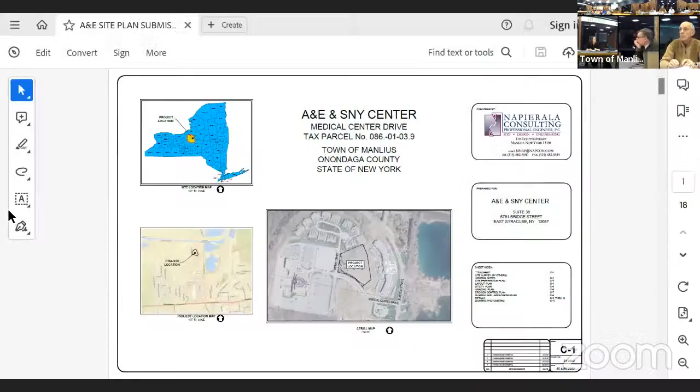And some of these, Doug said, have already been addressed, maybe. Scratch this. I just want to make sure I understand. C6. Yep.

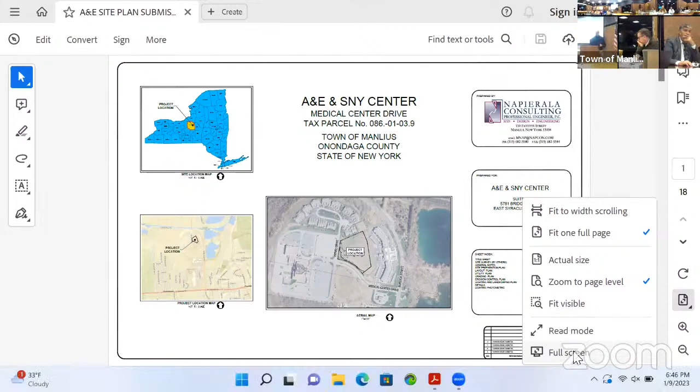So looking up in the northwest corner of the property where the entrance is, there's a lot of uncaptured runoff given the placement of catch basins. And at 7%, that's fairly steep. Very little is going to be collected in the catch basin down by the right of way. The rest of that runoff is going to end up going into the curb line and running down the road, to the catch basin at the corner of Avriel and Medical Center Drive.

And I think that could be a concern in the winter, especially with icing. I think it's something that could be remedied by tweaking the grading. Yeah, we could do a few things. We can put a little more of a crown in the driveway, or put in a trench drain. Really, that would be about the best solution.

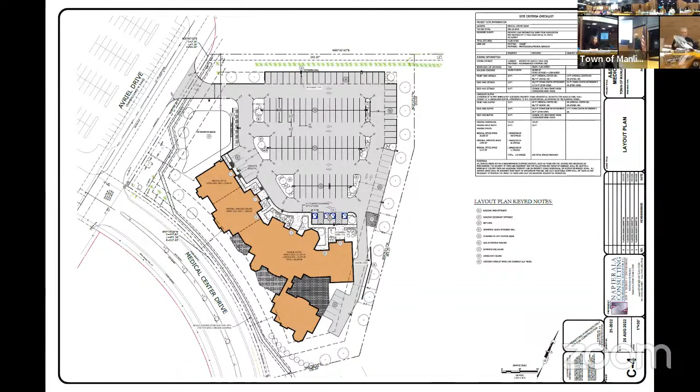So, because they can't see the grading coming out the other side, the grading plan, that's why I was. If you look at the grading plan, the contours don't completely cross. So I just want to make sure that people, that's a pretty small width of sidewalk, could be funneling all, you know, not like everybody's all coming at once, I get that, but

the nuances of how that kind of works, and to make sure that the handicap ramp is lined up with the entrance in a way that people can maneuver through there easily, especially when you get snow. I think you know what I'm asking. Yeah, we can look to adjust that. It could be as simple as bumping out the concrete and making the sidewalk a little bit wider

there. It's really tight. I'm uncomfortable getting into this area. I am not a code enforcement officer. I'm not an engineer, and we're getting into areas that I think go beyond what the planning board should do. I just want to throw that out. That's my. Pardon?

Maybe not, but when we get into handicap ramps and so on and so forth, that's something, when they go to get a building permit, they look at the building plan. We're not looking at construction plans. We're looking at a site plan. And so when we get to construction drawings, and a code enforcement officer has to look at it from elevations and ramps and so on, that's beyond what we do here. And that's just my opinion. Other people may have different.

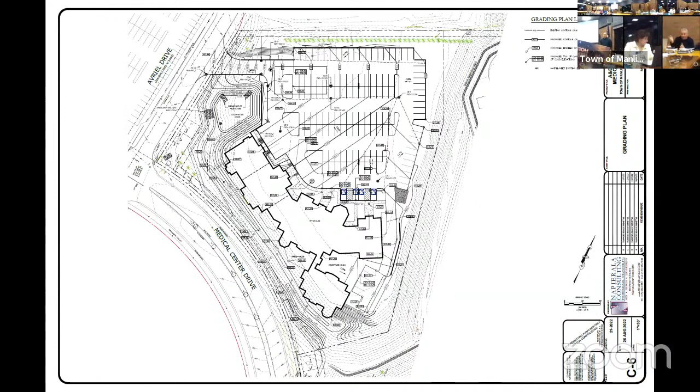And specifically, if the motion were motion to approve as presented, subject to the following 11 items being addressed by engineering. I would entertain that motion. Second, with comments, because there could be other engineering issues beyond what we just discussed. Right, in legal, you would always have control of those. So those specific ones would be good to put out so we know what those are, subject to a final legal and engineering. And also, one of the things we discussed earlier is that the uses be substantially as presented on the plan, because those are important to our control. So that's going to be a condition.

Also the finding on the variances on the road and block transfer. And a comment to follow up on that is that the variance was granted for the loading dock and the garbage removal. Can we put hours of operation on those things? No. So we can't say you can't collect garbage in the morning? That's why. I was gonna throw in one additional: subject to pulling the building permit. Is that doable? The only reason is it's a crazy world, getting everything. No, it's for extension. Okay.

And my understanding would be if any of these 11 plus engineering conditions require any sort of changes, they would come back for an amendment. Yes, that'd be my understanding. Arnie, did I see the sign? Did you make a motion? No, sign's not done yet either. No sign is approved. Correct. Didn't show that because of the other project you wanted me to take off. Okay. Folks, we have a motion made by Arnie, second by Richard. All in favor? Any opposed? Motion carries. Thank you.

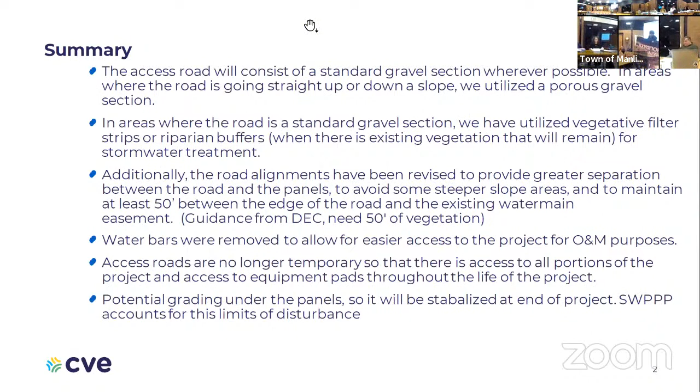Okay, to refresh my memory, the access road comes off of 173 near the cell tower, and that's the only access? Yes, correct. Okay, and I'm assuming you have now purchased the land. I see the stakes up around the cell tower. Yes. So it's been surveyed and bought, and recorded the subdivision? Yes. So the entranceway up Ruger Road? We do, but it's only a short entrance for the utility company for a point of interconnection. It doesn't connect to the facility.

I can pull that drawing up. These are all construction tweaks, and this is our last set of construction tweaks. Yeah, we heard that last time.

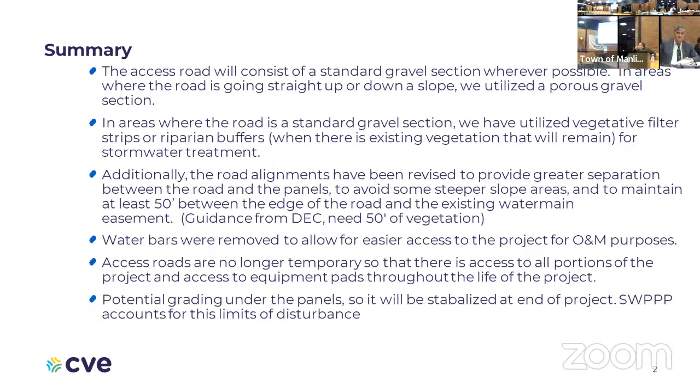So, we're shifting from the pervious gravel road to a standard gravel road in combination with vegetative filter strips. We're adding more spacing between the vegetative filter strips and the panels, which is increasing the spacing from the panels to the road. We only have one access road now, not a temporary construction access road and a permanent access road, just one permanent access road. And we're doing a little bit more grading underneath the panels. Is that the one that we went to the back, that's bumpy? Yes, we're gonna improve that. That will be your road? That will be our main road, yeah.

And you're not expanding the size of this development, so you're not approaching any of the setbacks, it's basically the same size? No. Same size, same number of panels, same everything. Doug, do you see any difference in stormwater? No. Looks to me like there's no impact that the community will be seeing, and the structures aren't going to be changing.

Carson, have you got your panels yet? That's a Mark question. Okay, Mark, have you got your panels yet? Yeah, we're just getting our panels in for this project. Where are they coming from? Mark, do you know who the manufacturer of those panels is, and what country they're coming from? Let's see. Christina, where are they coming from? Vietnam.

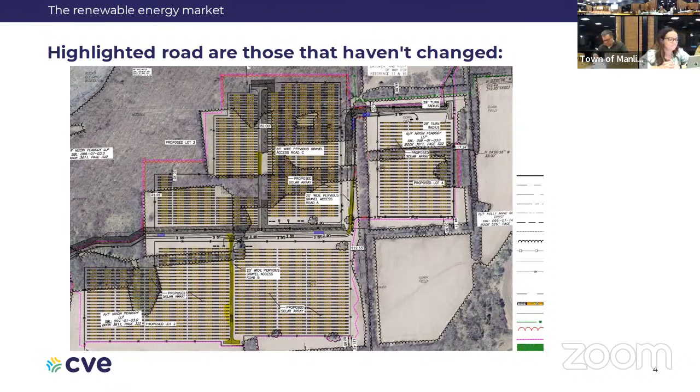The next item on our agenda is an application by Twin Ponds Housing. This is under an initial specification for a residential portion. We previously had seen property located at 5440 North Street, Fayetteville. It's all on one tax map number, 086-2-6.1.

Good evening, James Stracher from CHA Consulting. With me tonight is Charlie Brewer, who represents Twin Ponds Housing LLC. And to log in. Everyone has copies of the plans. We do need 11 by 17s that I can. Well, been presented. Okay.

So while he's pulling it up, just an orientation, as you are well aware, the property was previously in for a zone change, where this portion of the site that we'll be bringing up momentarily, and I'll just bring it up on. Now, for modern technology, doesn't work, you go back to presentation work.

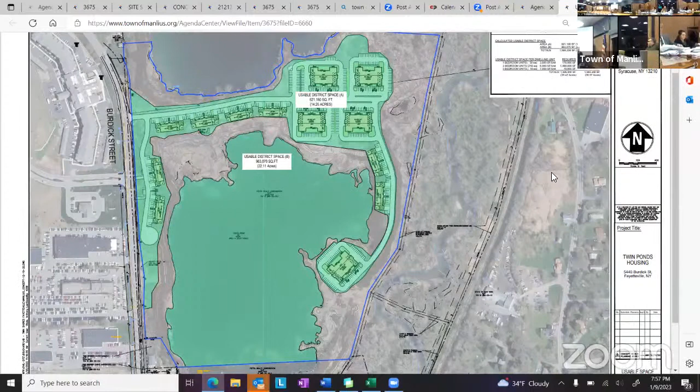Yeah. If you look at just those numbers, I just used the areas right here. If we take this screen where you've got the access roads coming into the apartment area without the pond, this is 14 acres, the pond is 22.11 acres. So if you just use that math, we're going to go from 276 down to 140, 125, because it's really a greater percentage.

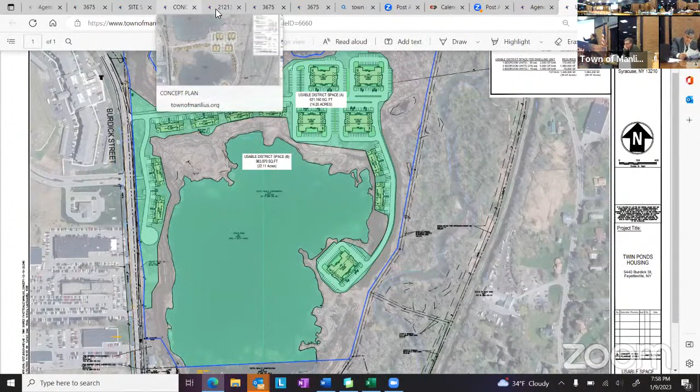So from a hardship standpoint, unusual land features, if there's a case going through the standards of proof with the zoning board of appeals, saying we have these ponds that were created, and if it's something folks want to see development on based on sale price and different things, it's something we can look at. Because our other request is the density, 3 units, meaning 4-story units, which have been done elsewhere, and into that hillside. I don't think there's any. Nothing yet.

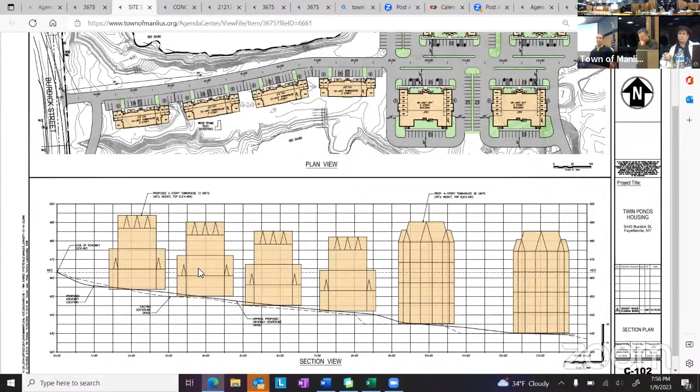So we're working under the new world of Onondaga County, with Micron coming in and looking at places where people can live. You can talk about Cicero, Clay, Lysander, Van Buren that are going to see that, but not everyone wants to live there. The City of Syracuse has been working on ReZone Syracuse for 3 years, and the mayor now has a big push to get that done. Some of the people who will live in these complexes are the tier 1, tier 2 spinoffs from Micron.

This would be a great place with access to the northern suburbs. So we can go through those calculations, but we believe in this area it's a good complement to what the town already has. But from my perspective, we have to live under existing laws. Understood. What you're saying is maybe in the future things change, but they aren't changed yet.

Okay, and that's perfectly fine, but if we can't use the pond based on conversation with the town attorney, we have to consider whether we look at a variance for the density and the height request and go to the zoning board of appeals. And would the zoning board of appeals look for a recommendation from this body on our variance application? Well, I think they would, certainly.

This is an unusual piece of land. It's been attempted to be developed for a long time. And the town board may want to look at something. We've never done something like a PDD. Maybe that needs to be talked about. So this board is hamstrung, and this is really important. This board has to live by the rules. Totally understand, and that this isn't going to work under those rules. So now the question is, what can be done, what should be done?

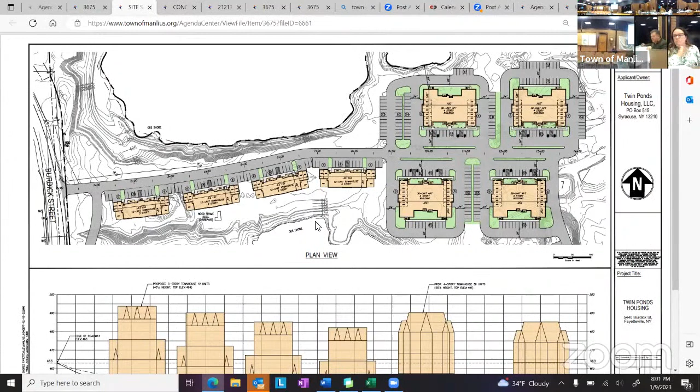I think this is the survey of the entire Vieta parcel, so that's not what we're talking about. Right, correct. So we had to do just your parcel. In terms of acreage, you're 14 acres. In terms of developable land, you take this land plus this land; these are the steep slope areas that get removed. Because it says the parcel size here is 52.2 acres. That's just because the subdivision isn't finalized yet. So that's just our piece, and there's a commercial piece, unless the subdivision has been signed.

It's general, the parameters of it. I think this is the line. Where are you building apartments now? We're doing 250 units off Lake Shore Road. Yeah. Developer.

I mean, I know they're looking for some input from us. But wouldn't the first step be subdivision? Well, because it's between 5 and 10 acres and you're not. The total land that we are believing that we will have at the end of the day is 55 acres, including the ponds.

Including the ponds. In our calculation, as I was saying, we took 14 acres. On this map right here, I'll just put the map, there's 14 acres here, 22 acres here. This other area is what classifies as steep slope under the code. So these are the numbers that we use in the calculations. If we pull out the 22 acres, the total density goes down.

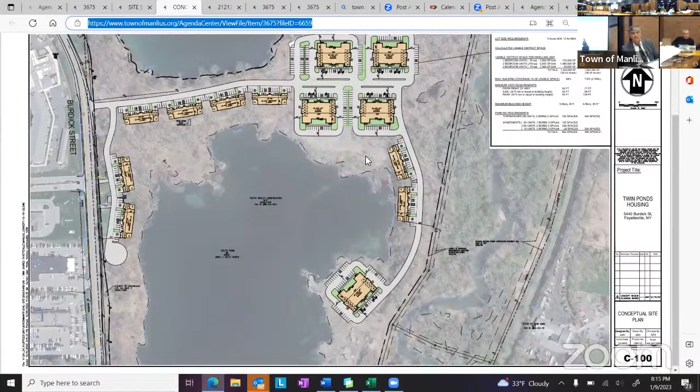Something in this area that changes. I did have a question, though. I'm seeing you have more land available to you as you move a little further east, where you got the 4-story buildings. You got one little pocket wetland. Is that why? So this is the wetland, this little thing right here. So when you ran his numbers, he took all that into account. Yeah, so that removed steep slopes, wetlands and everything else.

We really wanted to use a pond because we're gonna canoe, we're gonna kayak, it's gonna be a great amenity to this facility. Comment: I think that it's a great site to develop for residential, given proximity to the uses in the area. I think that you've taken the green area that you have now, including the water, and tried to really squeeze everything in you could to have something for us to get a visual on. I'm guessing these are like stamps, blocks that you dropped on from other projects. Correct. So I'm not up to speed on the numbers, but I can see lots of opportunities to customize things for the site, and maybe that affects your numbers a little bit.

When you're taking all that into account, having access, like we were talking about the light or making another light, I think those things are really important and that might drive where and how many units you have. The project isn't to that point yet, obviously, but I think that might factor into it too. I don't think it's a good idea to have anybody backing out into that entry drive. So is there a way to morph some of these blocks with this idea that might get you closer on the numbers you're looking for? Consolidating some of the parking and then taking a much closer look at the walkability, the livability of what this community might want to see. I think that will impact your numbers some.

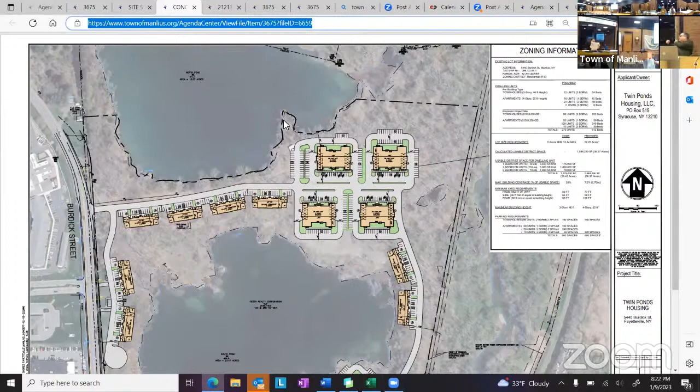I think the backside of the north pond's jurisdictional. I think so, Charlie. But the south pond is not. I could be wrong, but that might be, you're right. To your point, I don't think it really does. And it may be Army Corps jurisdiction.

As I said, Jim Fahey, he's an architect we work with on a lot of apartment projects. He's out of Rochester, he's done a lot of stuff on the lakes out there, and Canandaigua. So, his architectural renderings and designs, we started, said, hey, give us a footprint that we can go with and just see how we can get to a massing and a number of units.

And so we can work with him on different footprints, consolidating some of this stuff. So he could build it potentially closer together, allowing the green space outside so you can get some of the other amenities, gazebo, sitting areas, things for folks in the community.

Also, we already mentioned how people are turning around on that site. I'm not sure if that's really what the town is set on. So we look at these all as driveways, so you back out to the driveway. It's not a public road, so that's another great thing, so everything here would be owned, operated, maintained. So we will look at all those things, and when we come back and have the next conversation after we go through them, of what we can do in terms of building footprint, orientation.

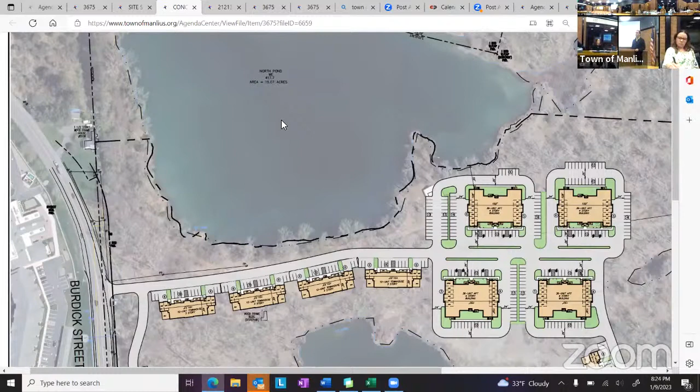But who would be managing? We have a third party manager that manages most of our property, whether it be a partner. I would love to see you come back and work on a couple of those things, just to save yourself some time in the board meeting process. That main entry drive especially, people are gonna get up a lot of speed in there. They're gonna have a straight shot up.

Yeah, based on the conversation here, we're bringing probably the main curb cut down here so we can come to a signalized location. And then, in any of these type of things, there's ways of doing traffic calming in terms of putting little radiuses or using speed humps, the elevated areas where, from a plowing standpoint, it doesn't disrupt the plows, but visually as you're driving in, you see the increasing grade and you slow down. So I think there's things that we can do that remedy a lot of those type of things.

So we appreciate your time, and Jamie, I'll reach out to you. I like the idea, and I don't mind the 4-story. In that particular location, it's gonna have virtually no impact on the rest of the community.

What about 5? You go to these places where people like parking interior, so if you could have a podium level below where you have parking, under a building with 4 stories of living, you're still accomplishing it. You might not like the cost, but it's a product that's not available here. You go across the country, you see these type of things, and when people are looking at renting, transient type of people, it's a big thing.

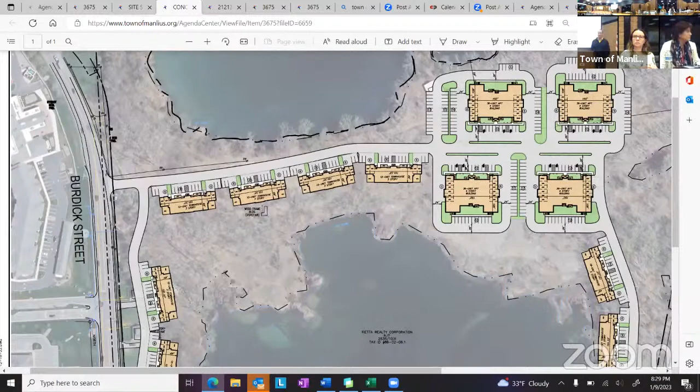So, we appreciate your time and comments, and we'll reach out the next day so we can get things coordinated and we can come get copies or have things reproduced so we know what other people have thought about in the past. You'll send over the topo? Yep. Thank you, gentlemen. Thank you. Appreciate it. Have a good evening.

I'd like to say one thing to the board. Charlie reached out to us probably about a month ago. And the chair thought it was important for all of you to see this presentation, not just a one-on-one with the chair and the attorney. So I think kudos to Joe, because I think this was really productive. Yeah, thank you. Got good feedback. Thanks, Charlie. Thank you for coming.

Folks, ordinarily we would include other business. I have one thing, Jamie, to ask. I don't remember if it was the last meeting or the meeting before, we were discussing a recommendation for Eastern Hills Bible Church to go to RM. And I thought we talked about sending a letter to town board that said, we'd like to talk to you about why you made the changes to the RM zone. And we wanted to get some feedback before we made the recommendation.

I don't think that's what happened, that we would ask for a letter. Not a letter, but just some discussion of, okay, you made some changes to the RM zone, fill us in on why, so we can better make a recommendation on Eastern Hills Bible. This is what I remember we discussed. Whether or not that was done, I don't know.